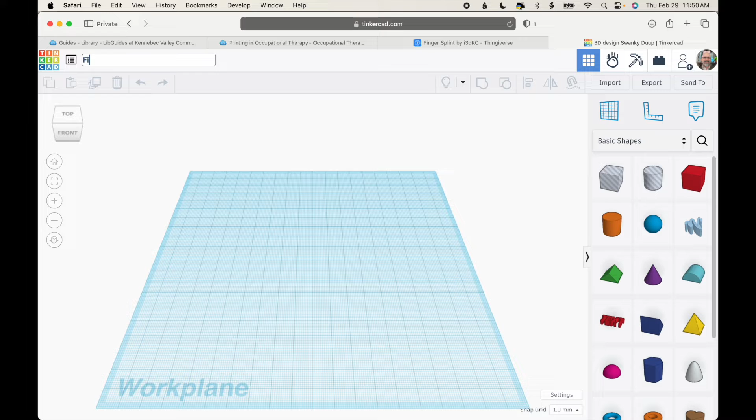I'll start by changing the name of the design, then click Import, choose File, pick the first finger splint, and click Import. Once it's imported, click on it and drag it over to the side.

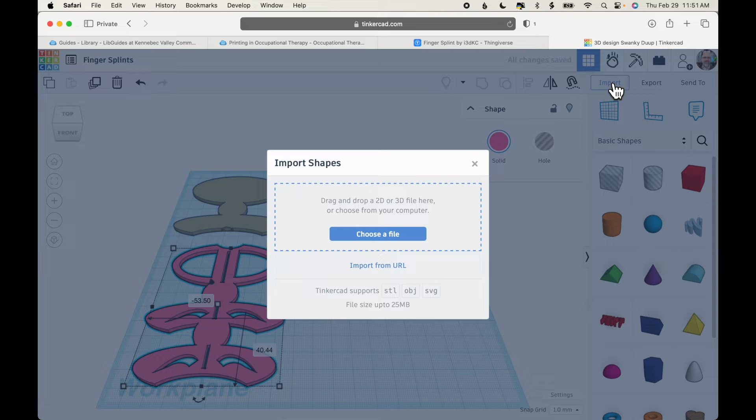Then click Import, choose File, select the next splint, click and drag it over to the side, click Import, choose File, and the third finger splint, upload, import. The program automatically assigns different colors to different models, but for ease of viewing, I'm going to turn these all the same color.

Let's say this color. To rotate the work plane, I'm going to hold down the Control key on my keyboard and tap and drag on my touchpad. I'm using a MacBook laptop.

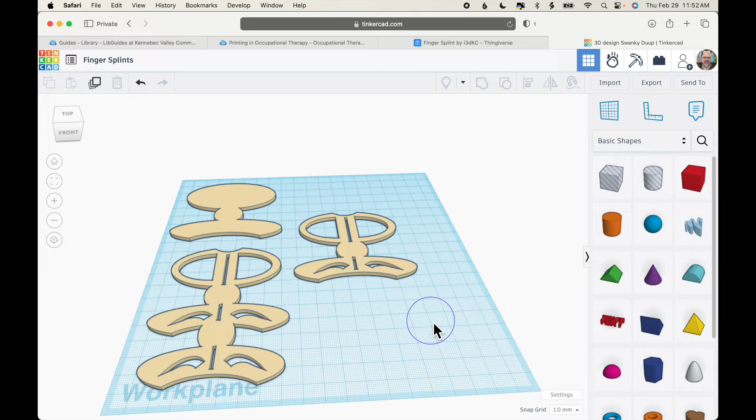I'll look at these from the top. Actually, I'm going to switch to orthographic view, so I'm looking straight down, and then I'll tap top to make sure that I'm looking straight down.

Let's say, for argument's sake, that this splint is too large. We like the design, but it's just too big. If I click on the model and then click on one of the boxes on the corner, I can change the dimensions. So let's say I want this to be 65 instead of 75, and I want this to be 75 instead of what it was.

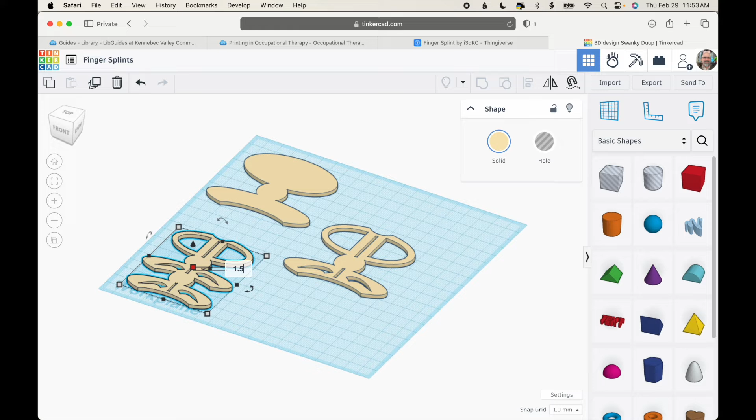Now that I've made it smaller, it's probably a little bulky, so I can click this middle box to change the height. Let's say I go from 2.5 to 1.5, make it a little thinner. That's how you can reduce the size or reshape even the existing finger splint.

In the next scenario, let's assume that this finger splint is the right shape and size, but we want to add some more firmness or stiffness to the middle. Right now there's a hole or a slit cut down the middle here.

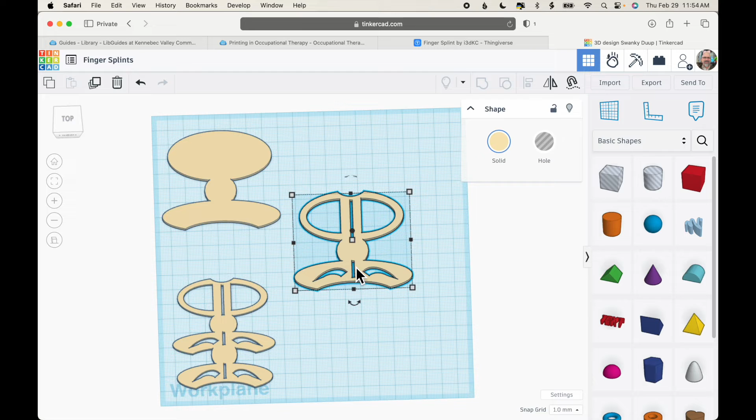So I'm going to click top again, so I'm looking directly down from the top, click off the shape, and click and drag out a cube. I'm going to click this middle black button on the bottom so I can drag out in just one dimension, and drag to make it thinner this way.

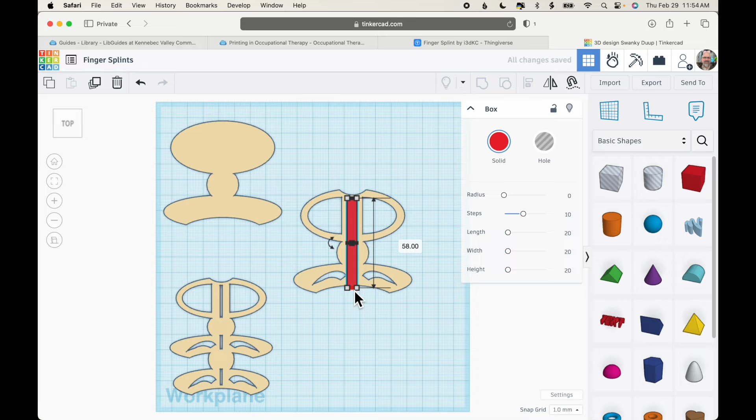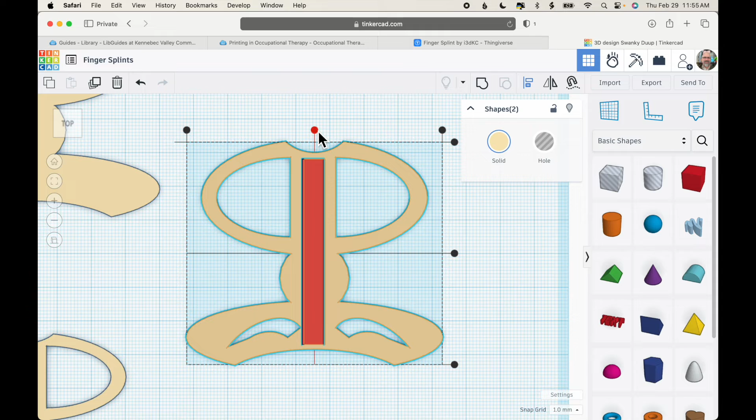Because this is so small, I can't easily see that black button in the middle, but I can tap the F key on my keyboard and it will zoom in or focus on that selected shape. Now I can click and drag that middle button to center the two shapes, click off both shapes, then click and drag to select both of them, and up in the upper right corner, click Align, and if I click the center dot, it will align those two shapes from side to side.

Now I'll rotate this so I can see it from an angle. If I click on the finger splint itself and then click the height indicator, I can see that the splint is 2.5 millimeters. So I'll click on the new shape, make that 2.5 millimeters and hit enter.

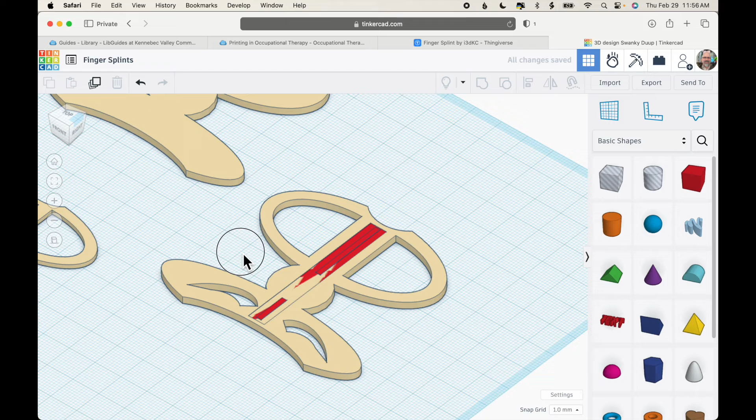Now I can click and drag to select both, and up at the top on the right, I'm going to click the group icon. So now I've sealed up that slit in the middle. We now have two customized splints.

Then for the third one, click top, focus in. Let's say, for argument's sake, that I'm happy with this splint as is, except I would like to have a large open area here. So to do that, I'm going to click and drag out a cylinder.

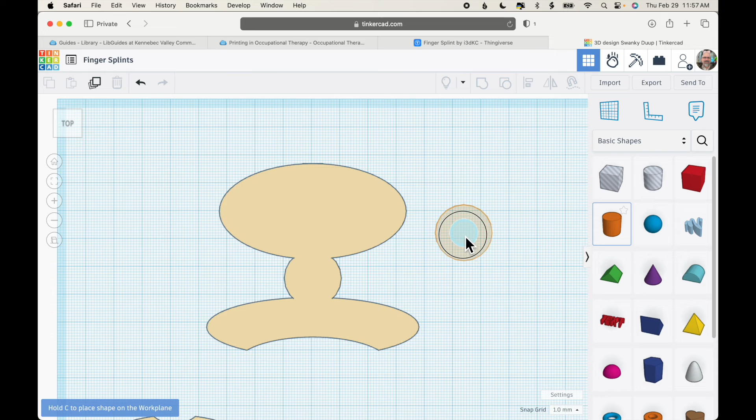If I focus in, you can see that the edges are rough. But if I use this sides slider and move it all the way to the right, you can see that smooths out the curve. Now I'll move this out here, click to extend that way and this way, and click to extend it up and down.

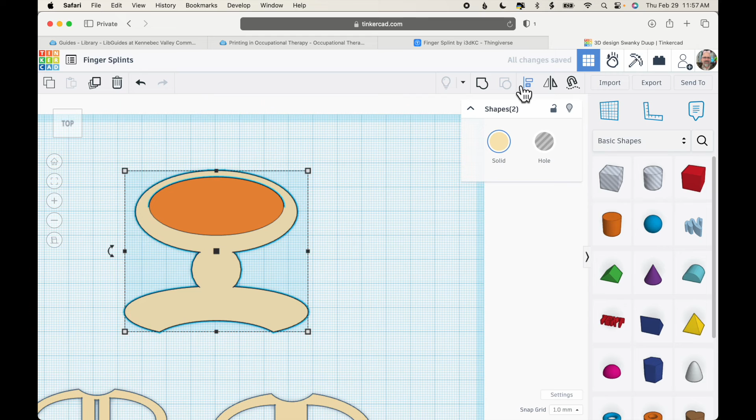I can select both shapes and choose Align to move it in the middle. You can play around with resizing and moving until you get the desired result. Now I'll look at this from the side again.

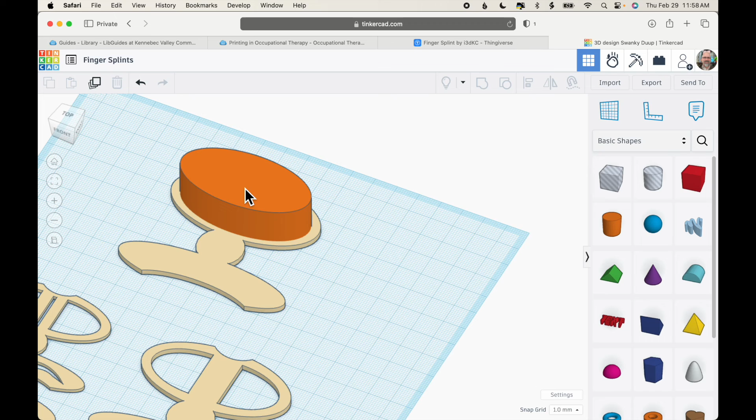I don't want to group these shapes as is because I have two solid shapes and I'll just end up with a third solid shape. But any shape that you drag out from the side can be turned into a negative. So if I click on that cylinder, I have two options: it can either be a solid or a hole, a negative. I'm going to click the hole, and I now have a negative shape.

So if I click off both shapes, click and drag to select both of them, and then click group, what happens is it cuts a hole out of the middle.

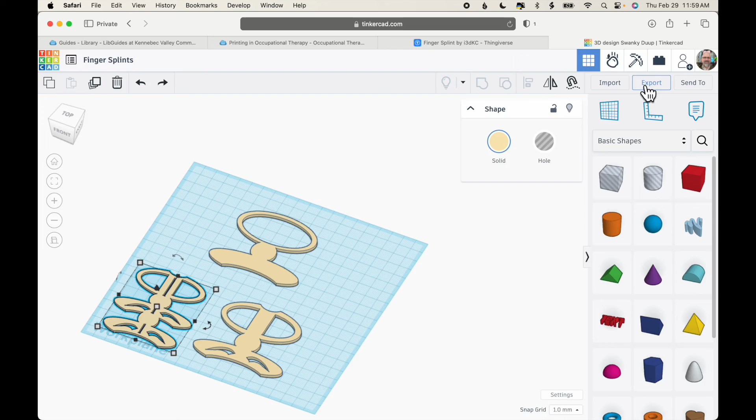Now that I've finished customizing all my finger splints, I can click export, choose STL, and do that for each one. When I check my downloads folder, you can see that all three of my customized finger splints are present.

Now what you would do is import the finger splints into Prusa Slicer, slice them, export the G-code to a thumb drive, and then plug the thumb drive into the printer and follow the 3D printing procedure.